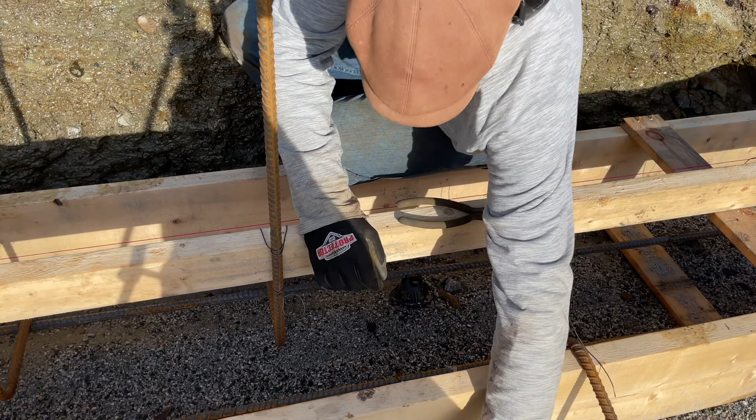I hold it, I go around the rebar, come down, around, pull it tight, get it tight, and give it a couple twists to hold it in position. Now this is kind of a fun thing. You take these little pre-made ties with these little loops in the end, and this little tool. I don't know if you can see down here.

Basically, it goes like this. You stick them through, and then you twist. It clamps down. Hopefully you can see in this rebar here. Around the rebar. Good loop. And twist. Twist. Voila!

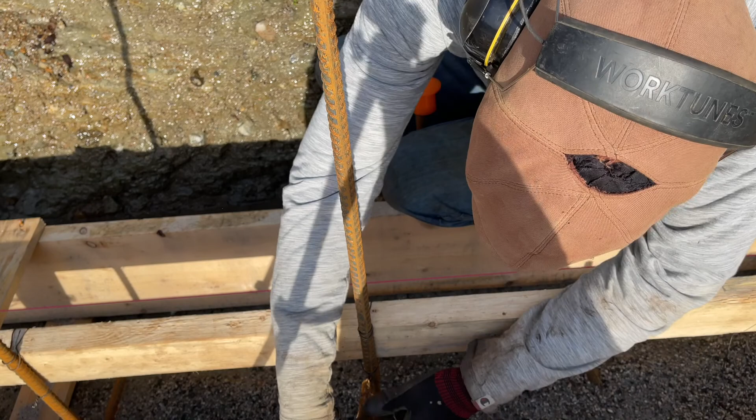And then I take this, cinch that up a bit. There you go. There's your rebar. Might give this a little extra twist. Clip it. Push it down a bit so nobody cuts themselves. There you have it, all tied. Really hard to do by yourself though. You're better off having someone hold it for you, but it's not the way I roll.

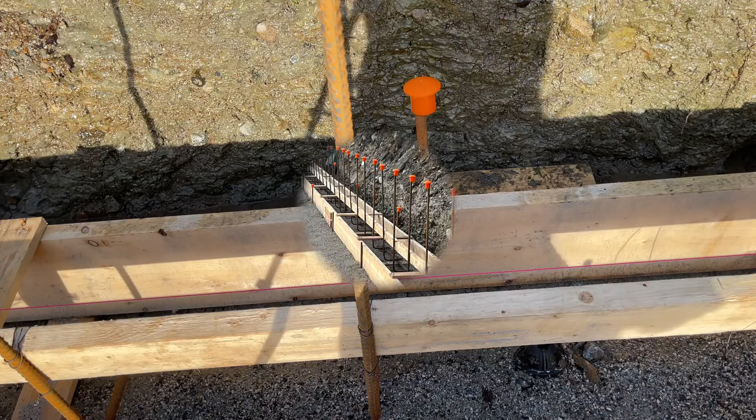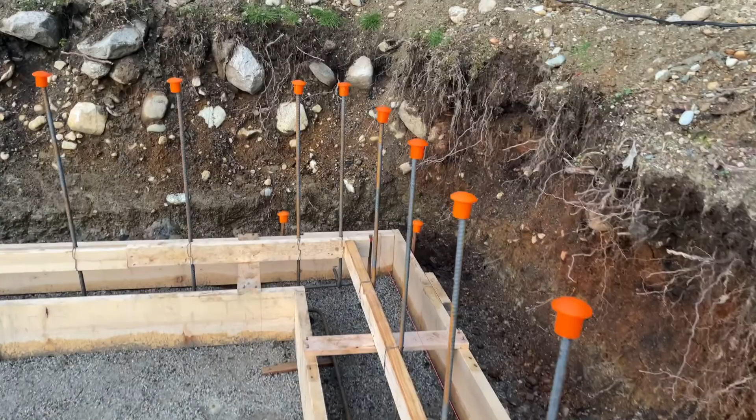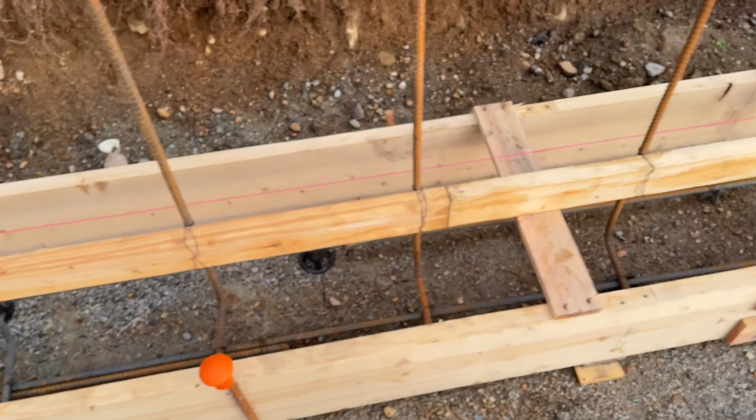Alrighty. Now we're cooking. The power of repetition. I tell you, it took me like 5 minutes to tie each one of these at the start. Now I can do about 5 in 10 minutes. It's just the way it is in life. So super happy. Rocking and rolling. Check it out. Look at that. They call those verts. Verts. Vertical. Excellent, dudes.

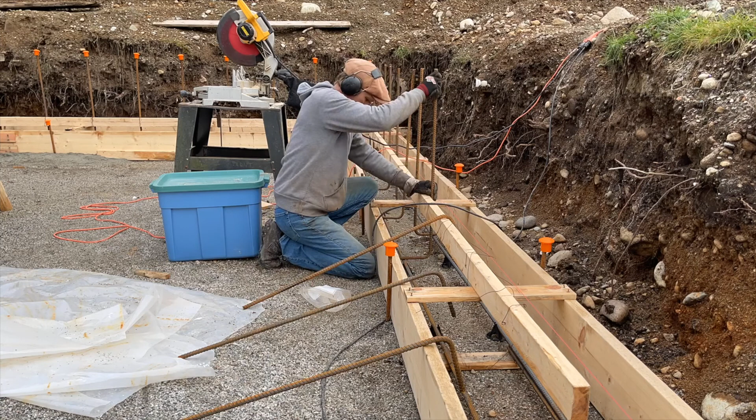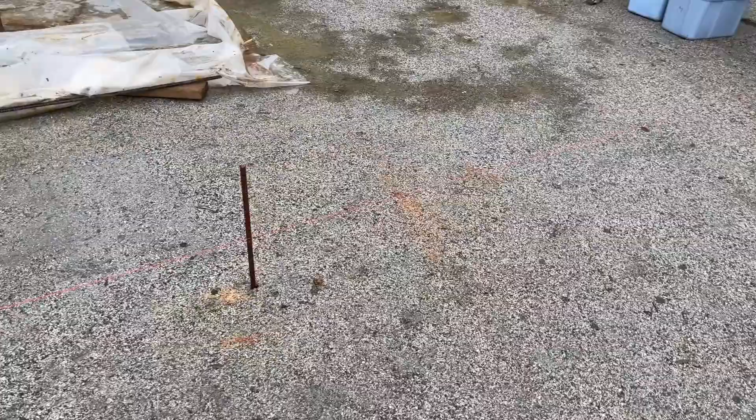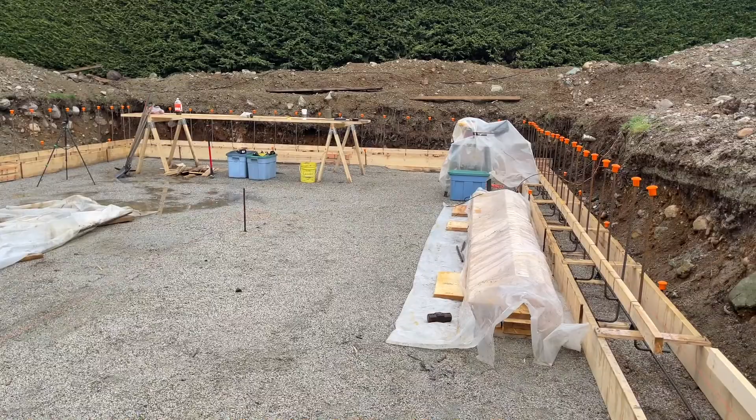Okay, excellent. So, after much calculation and measurements, based on the engineer's diagram, I have marked exactly where there will be a vertical post here and here, and they will support a big metal beam, which will allow the entire basement to be completely open, which is nice because you don't have a lot of posts to prohibit you from doing different activities like a pool table, ping pong table. Not that I plan on having those things, but you know.

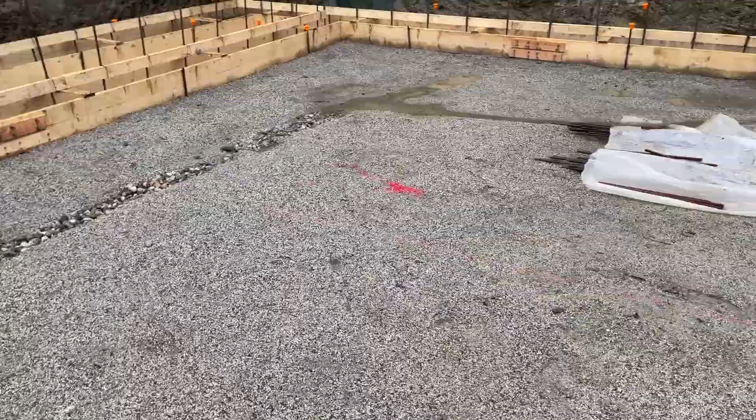Anyway, so now I'm gonna build some big wooden boxes here, and they will be inset in the ground a little bit so that they're level with the perimeter footings. And they'll have rebar in them, and they'll be filled up with concrete as well. But it's snowing and sleeting out right now, so I'm gonna call it a day. And I'm cold. It's just not nice. My hands are wet. I'm all wet. So just thought I'd give you an update.

Just about finished the perimeter rebar. I left this little bit open here so that I can dispose of some of this excavation, because I'm gonna have to dig into the ground. So I'm gonna have to get that out. It'll be easier to throw it out of the hole without these bars here. And so kind of cool. A little bit delayed lately. I've been really busy with other things. But hopefully we'll see some great action soon.

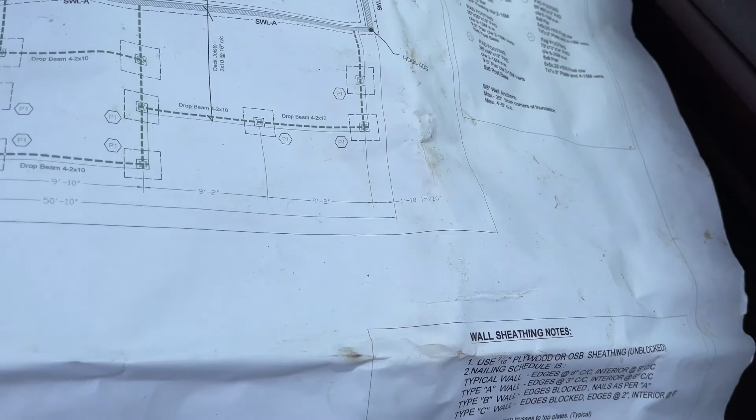All right. Well, it's another rainy day here in British Columbia, February 3rd, 2022. This is what a set of working drawings looks like, we have 3 or 4 copies of this. This is my truck version. This is engineered. It's got a stamp. It's all been engineered. Today I'm working on these boxes here that will support the vertical beams. And I see my mason has made a note there that there'll be like a 20 by 20 inch raised pedestal in the middle of that one.

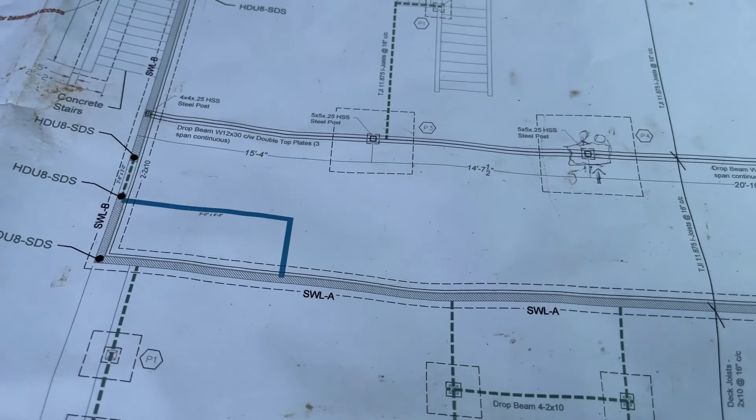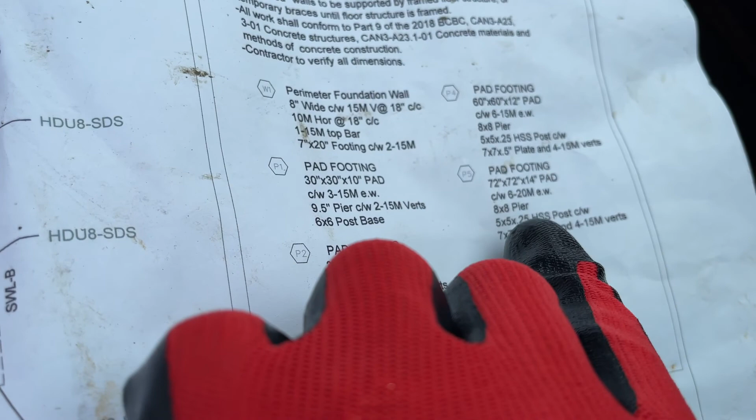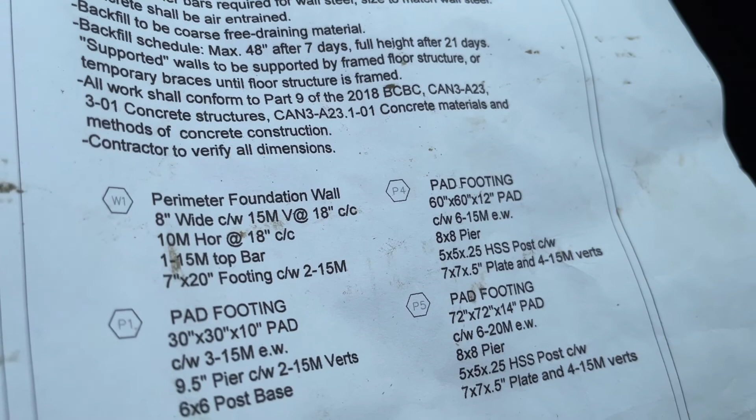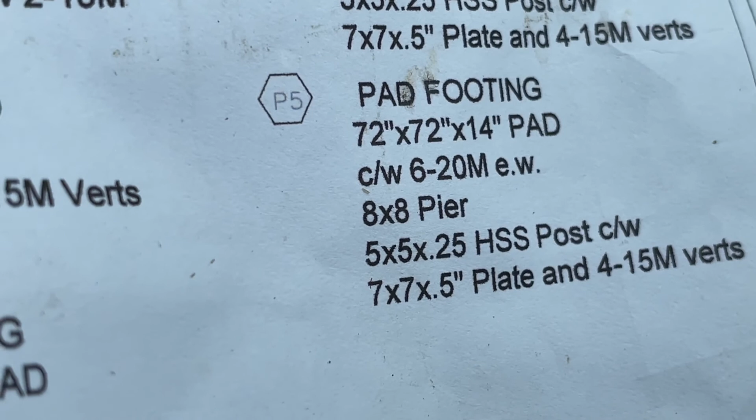And according to the legend here, that says P4, and that says P3, but that's actually P5 and P4. I think he just made an error. It's 72 by 72, and this one's 60 by 60 by 12, and this one's by 14. Think about that: 72 inch square by 14 inches full of concrete with 6. Let me see if I can zoom in. 6 pieces of rebar, 20 millimeters, E.W., which means each way. You're doing a grid pattern with 20 mil. That's 3/4 inch rebar, 14 inches thick.

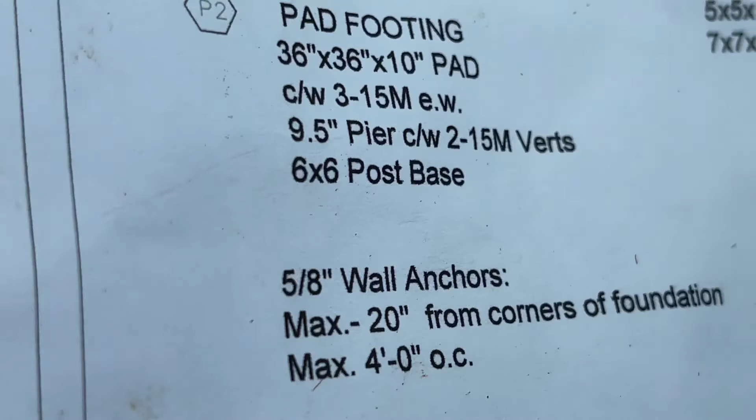You could launch Elon Musk's Starship off that thing. Not to mention hold up a couple floors of a house. And that one's 60 by 60. So I'm gonna go make those now. I just have to remember this data. 60 by 60 by 12, 72 by 72 by 14. Alrighty, let's go have some fun.

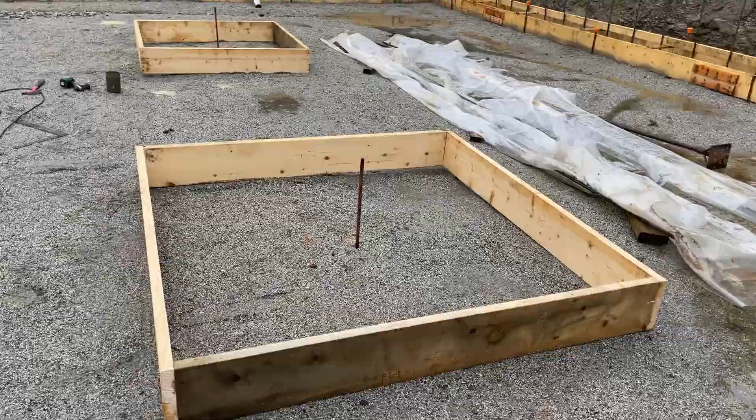Alrighty, there we go. So this one has to be 12 inches deep, and that one has to be 14 inches deep, which are not standard denominations of wood that you can buy. So I'm going to have to go cut some strips and attach them to the top. So I'm off to do that now, get the table saw happening, and we'll take a look after that. So excellent.